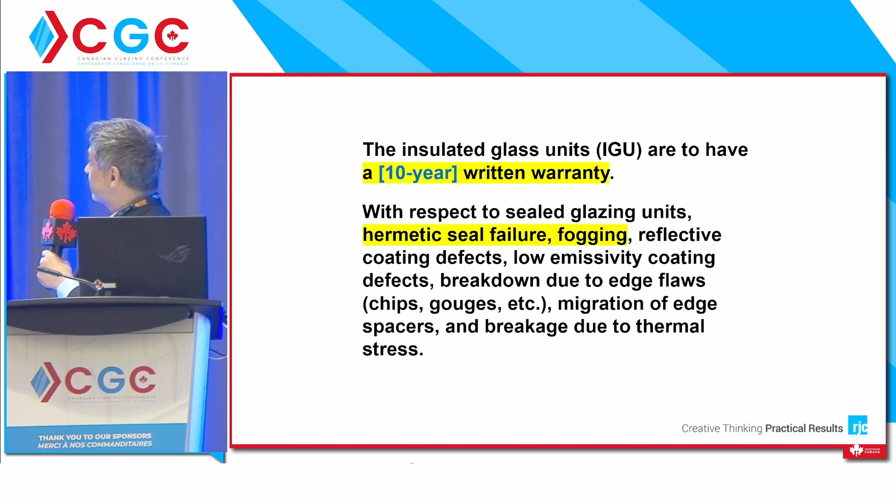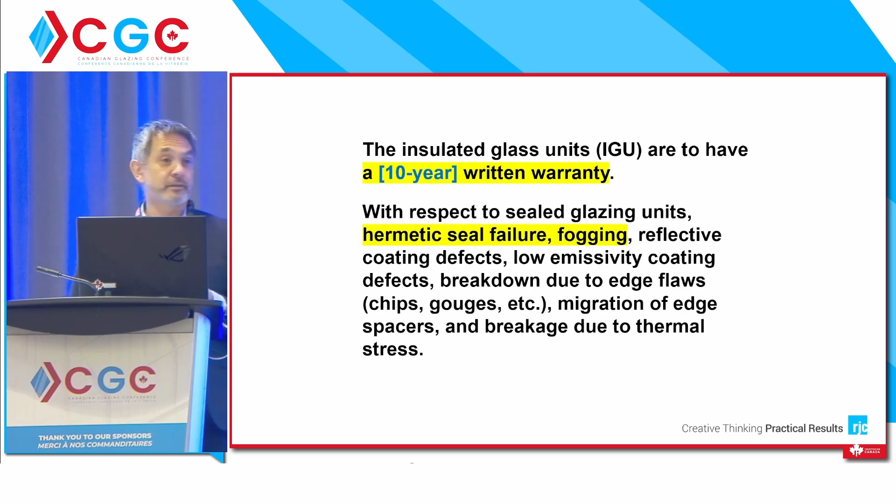What do those things say? Well, usually they say the insulated glass unit should have a 10-year written warranty. And I won't read that all out, but it's against hermetic seal failure or fogging, and some more stuff in there.

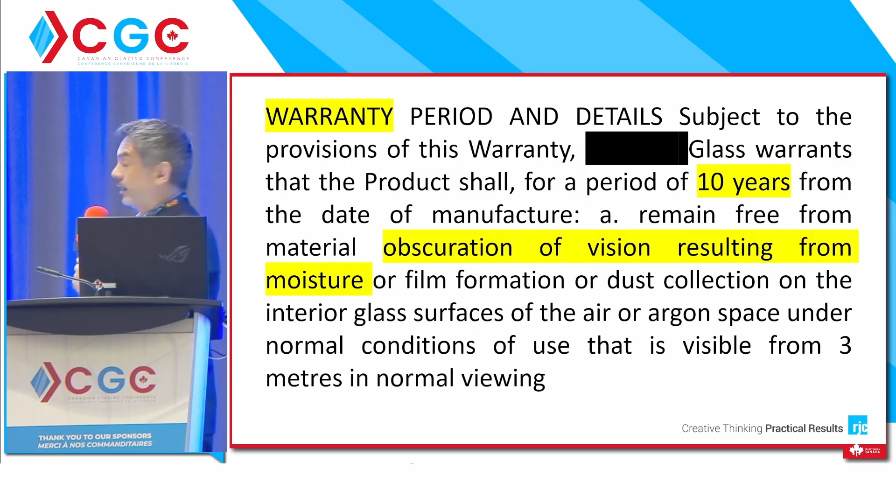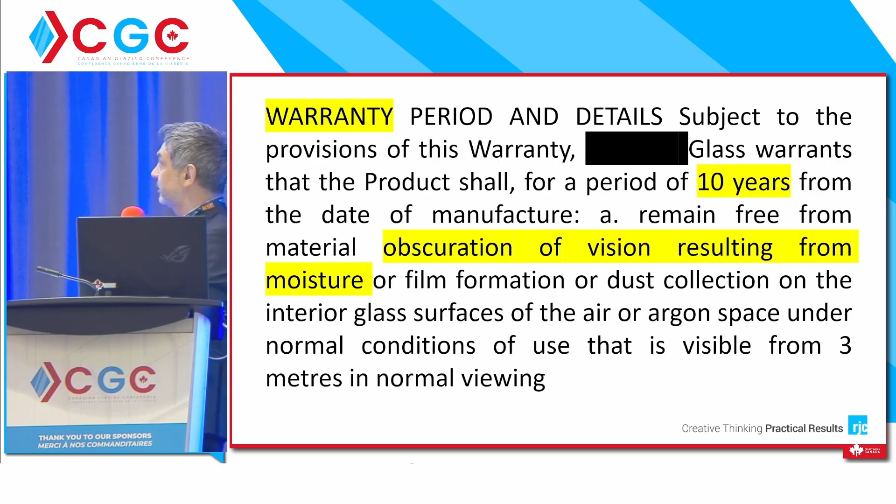Okay, so there should be a written warranty, right? What's the written warranty say? So dig up the warranty document and you'll see something like this: the warranty period, details, blah, blah, blah, 10 years, free from material obscuration of vision resulting from moisture or film formation, right? That's fogging. Okay, so we should be getting at least 10 years out of it.

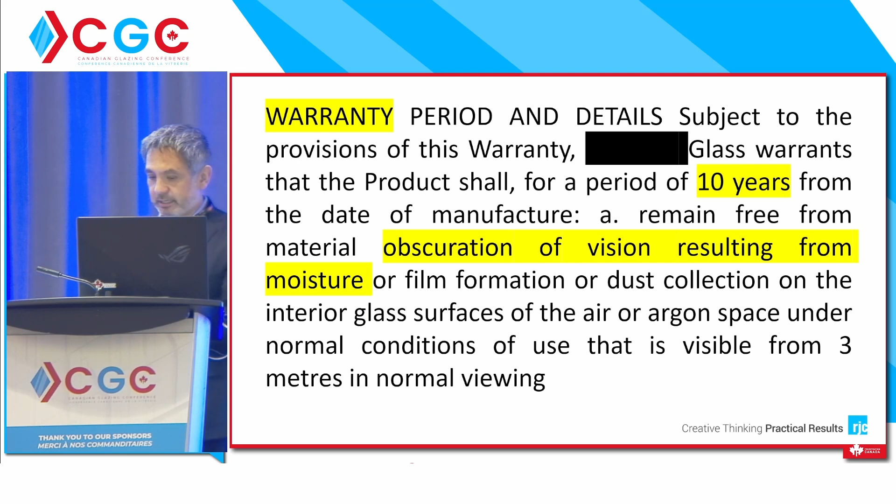I don't remember it being that long ago that those windows were installed, so I'm thinking, okay, I'm going to call my warranty provider and get those things replaced. But again, my curiosity drives me to want to look at what the industry standards and what the codes say.

The whole presentation isn't going to be slides with words, but I thought this was a good way to get started. So there's the IGCC, which is the, they changed their name, so I always get it mixed up with IGMA, but it's the Insulating Glass Certification Council. So if your windows are certified to IGCC, it means you've tested them either to this ASTM standard or the CGSB, the Canadian equivalent standard.

And if you've done that, that means you've met code, because whether it's the Canadian code or the BC code or the Vancouver Building Bylaw, it means that you've tested to either one of those standards. So if you have IGCC certification, it means you meet the code. But if you don't have that certification, it doesn't necessarily mean you don't meet the code.

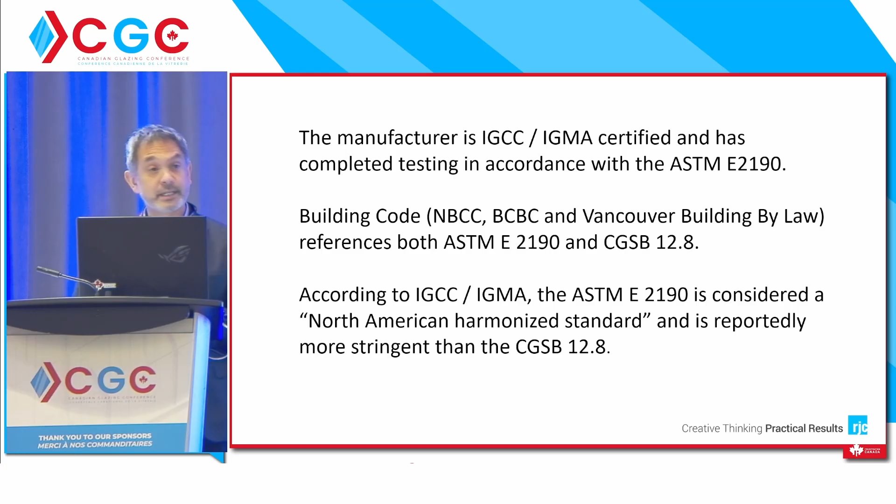But these standards drive how you test and challenge your sealed units and try and create some standards among manufacturers to challenge the durability of the edge seal, primarily to prevent fogging and to maintain the energy efficiency of those windows. Okay, so this gets me into what I want to talk about today, which is the service life of a window.

The expectations around how long your window should last, or the time it takes to get it to fog in service, relies on the edge seal and primarily its ability to keep moisture vapor out of that cavity between the two sheets of glass. So this is largely driven by the diffusion of vapor through the components of that edge seal. And when you get enough vapor in that space, under the right conditions, you'll get condensation, which is what fogging is. So the seal integrity is directly related to the service life of the unit.

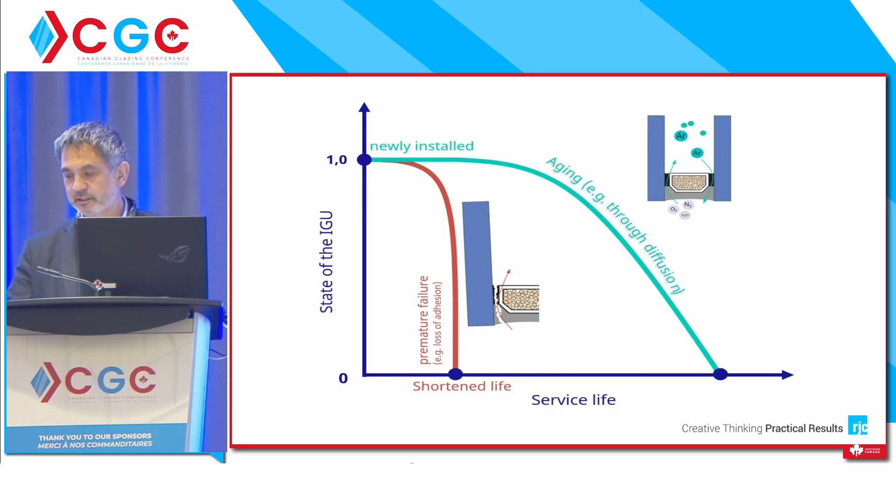And that's really what I want to spend the rest of the talk exploring with you. This is going to be sort of my collected works and thoughts over 20 plus years in the industry. This is kind of a new presentation, new material, and it's all my thinking that I've pulled together over this time frame around trying to answer that age-old question: how long should my windows last before they start fogging? So a good starting point, I thought, was to try and understand or describe a little bit the science behind condensation.

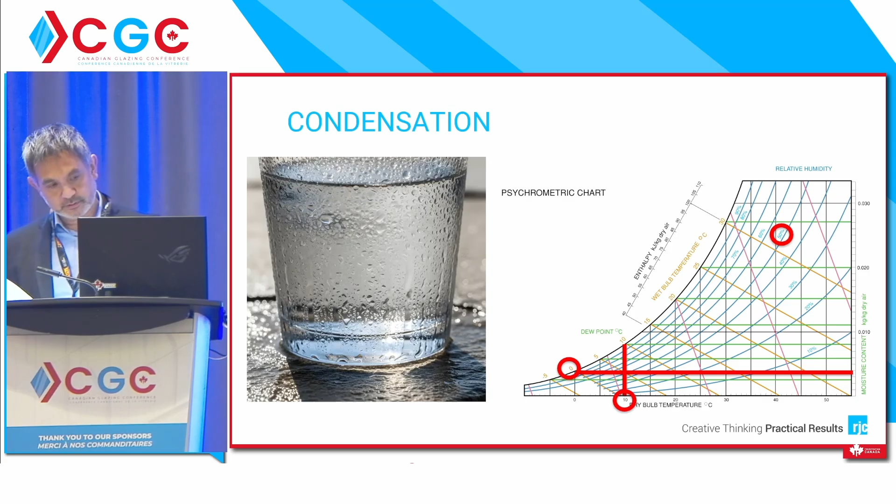So what happens if you put a warmer glass of water out? Say a steaming hot glass of tea - you rarely or never see condensation forming on the outside of it. Why is that? Well, the psychrometric chart says that at 50% relative humidity, and I picked 27 degrees because it's a convenient number on the chart, 27 degrees isn't very warm - your guests would be disappointed if you gave them a cup of tea at 27 degrees, it's like tepid water, like a cold bath. Body temperature is about 36 degrees Celsius. So what this says is that if you put that tepid glass of water on the table, you would only see condensation forming at around 40 degrees. So you're not going to see that in Vancouver.

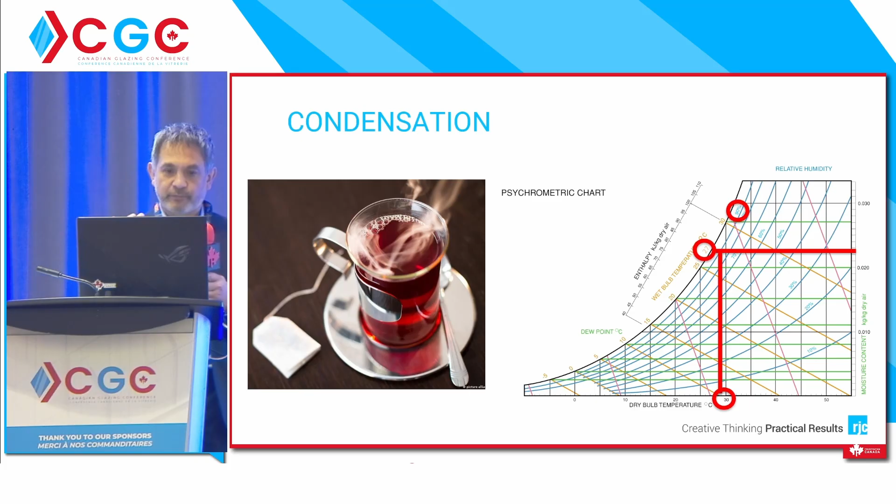Now say you were somewhere in Asia, Indonesia maybe, where the humidity might be higher, like 90+% humidity - you would only see condensation forming at around 30 degrees, according to this chart. So without explaining too much more, the point is there's reliable information from this chart. It's very predictable and relatable to basic quantities we can understand - relative humidity, temperature, and the surface temperature where we expect to see or not see condensation forming.

So how does that work within a sealed unit? We have to talk about permeance, which is the rate of transmission of vapor into that airspace. That's largely driven by the components of the edge seal. You've got two pieces of glass, which is pretty much impermeable to moisture vapor, and you sandwich that together with the spacer bar.

The spacer bar can be a lot of different things, but for argument's sake let's say it's a metal tube - you can go back and look at the Vitrum table, they have a nice cutaway. You can see a metal tube filled with desiccant, and it's glued to the sides of the glass with PIB, polyisobutylene. It's basically a glue that sticks the spacer bar to the glass. You try to get that as thin as possible, less than 1 millimeter thick and maybe 4 or 5 millimeters deep depending on the size of your spacer bar. That generally dictates the amount of moisture vapor that transmits through the edge seal, because it has very low permeability and a very small area. That's there just to glue the spacer bar in place.

Then there's the silicone, the secondary seal, which is the structural glue that holds the sandwich together. When you think about vapor transmitting through that assembly, the PIB is the limiting factor because it has the lowest permeance - it's the most difficult for vapor to go through. I use the example of a multimedia water filter, where a layer of really tightly packed material is what the water has the most difficulty flowing through. That's kind of like the PIB, and that's the limiting factor of what transmits moisture into the sealed unit.

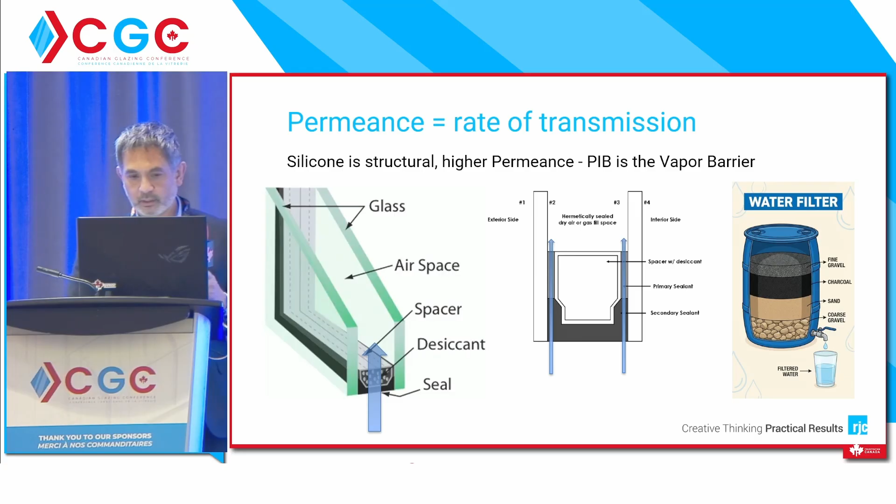Okay, we're getting a little more serious about the science here, but again, this isn't supposed to be about moisture diffusion physics, but this is a very important idea here. So moisture or water vapor behaves differently from water, and it follows the laws of vapor diffusion, which is governed by Fick's law. So I'm an engineer, I like equations, so I put one equation on my presentation.

Water vapor is sort of the liquid water in its gas form, and it's formed naturally through evaporation. When you heat the liquid up, the particles of water kind of break free and they turn into this gaseous form. And the limit of how much vapor is in the air above the water is dictated by the vapor pressure that's in that system.

I don't think I'm explaining it very well, but again, this isn't supposed to be about the detailed physics of the way this works, but there's an equation, and the amount of diffusion that occurs is based on the vapor pressure difference. Physics says that you go from a higher humidity to a lower humidity. And if you think about that spacer bar, that's that solid red thing where moisture is from the outside environment trying to drive into that dry airspace inside the unit.

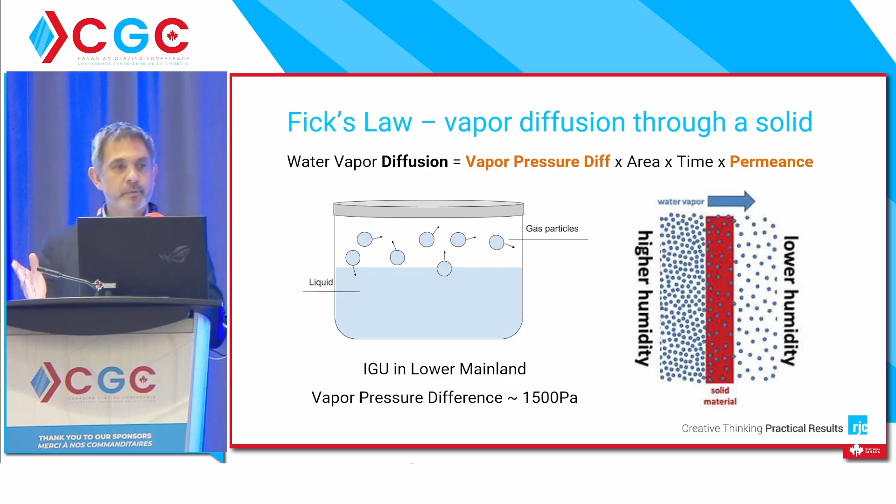So in Vancouver, we generally accept that the vapor pressure difference is like 1.5 kPa. That might not mean anything to anybody, but that's a number that we use to sort of average out over the year to account for the fact that you have very little humidity inside the unit and a variation of humidity outside the unit. And that creates this pressure differential that wants to drive the moisture into the unit through that PIB that's holding the spacer bar in place.

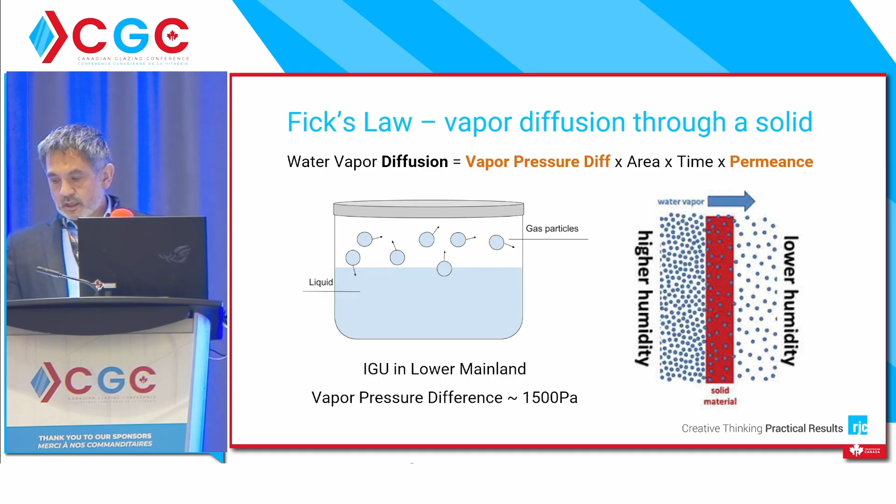Okay, so how reliable is the science? And this is really sort of the basis of my talk. Oh, wait, there's another slide here that's out of order.

Okay, so when is the primary seal not good enough? This is like the age-old question, because we know the primary seal is very important to stopping moisture from entering the cavity. And there's not really a lot of information out there. There's this standard that's published by IGMA. It's the TB 1250. And it talks about these 3 standard kind of deviations from what you should expect when you're manufacturing sealed units. So there's this squeeze out, and I think we can kind of imagine what that means.

You lay down this line of PIB as the glue and you push the units together, and some of that PIB is maybe going to squeeze out. And so this standard is saying, if you're a manufacturer, you should limit that to about 1/8 of an inch. There's this thing called migration. We've probably all seen that. These little fingers of the PIB that kind of leak out and create this weird looking appearance on your spacer bar. It says that if you have more than 1/2 inch migration, there's something going on with your PIB. So that's not good. It's not really acceptable from a manufacturing tolerance standpoint.

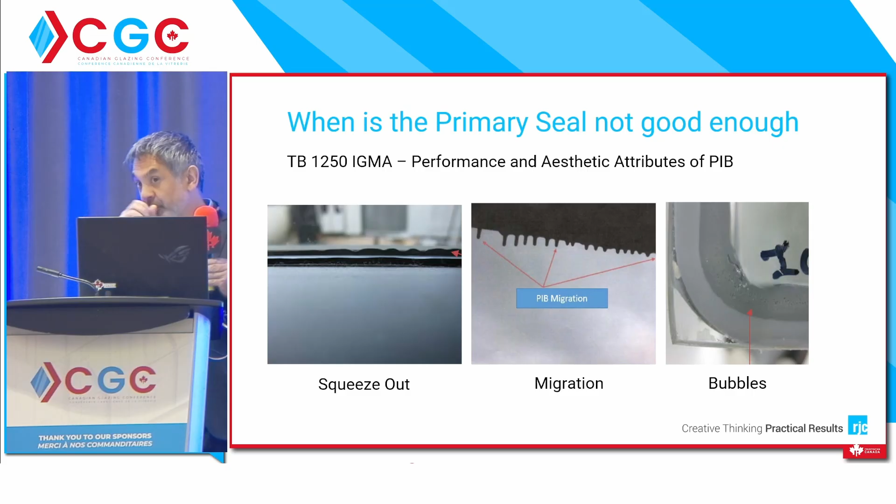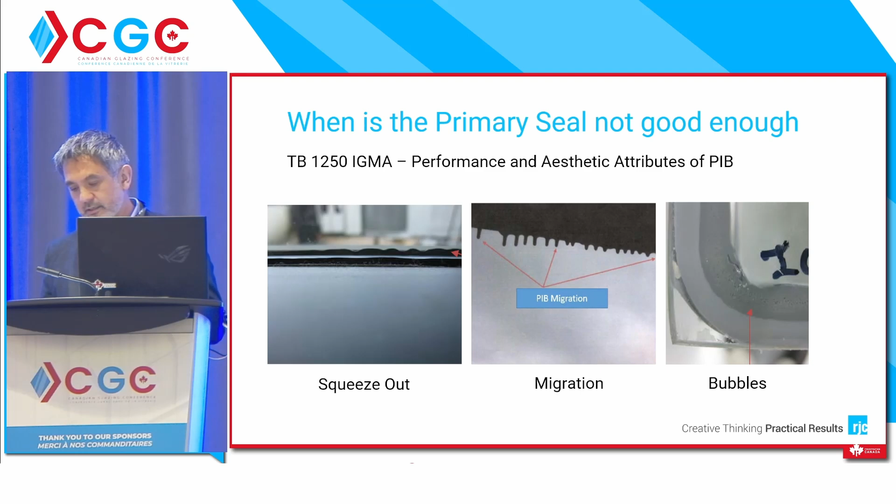It says bubbles can form in your primary seal and your PIB. It says that you should be careful to limit how much bubbles form, but it doesn't give you any guidance. Maybe some of the IGU manufacturers can shed some light on this, but there's nothing that says your bubbles should be this big or this small. It just says you should be careful about bubble formation. In the end, this is a qualitative guide for manufacturers and doesn't give any guidance on the effect of the permeance in the PIB or any direct correlation to IGU lifespan.

So that brings me back to the science, that Fick's law equation. How reliable is it? Well, I think I've seen that the science, being what it is, can be applied inappropriately sometimes by engineers that are trying to do their best to figure things out. You can't look in a book for the properties of PIB and the permeance values. There's many things that aren't very well defined.

So as an engineer, there are certain things like concrete and steel which are very well defined. You can look in a book and it'll tell you the strength of the steel, and it'll tell you many things about those materials, and you can rely upon them to do calculations to determine an end result. You can't really do that with Fick's law because there's many things that are not defined in that same way. So there's no science that has taken the science and made it relatable to actual reality. That's the whole point of my talk, really.

And the results can be very sensitive. You change that little thin strip of PIB, you change that dimension by 10%, and that can have a huge effect on your predicted lifespan of the unit when you apply this law, Fick's law.

So here's a story of something that occurred on a project site that I was involved with, where we had some units delivered to site, and they were clearly defective. The edge seal had bubbles in it, and there were huge gaps, and we just said, you can't install those. Those are defective. They don't meet the spec. Send them back. So they didn't like that.

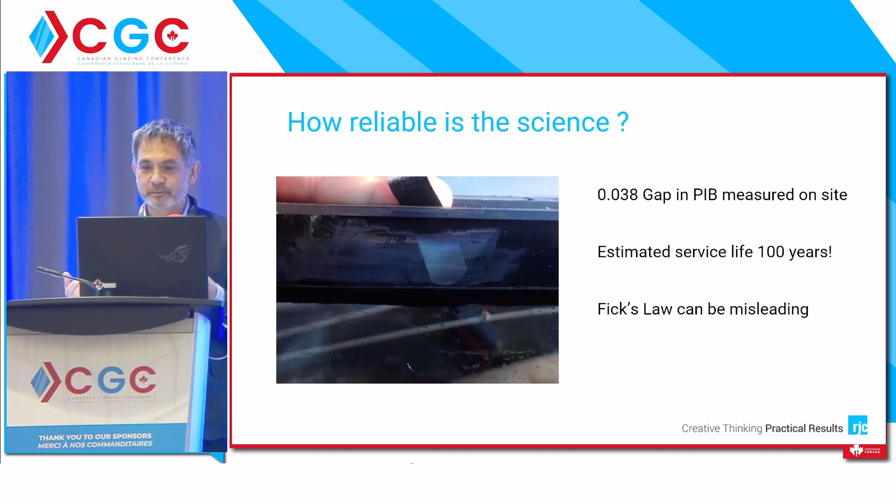They went and hired another engineer who went to site and did measurements. They measured the gap in the PIB, and they said, there's a gap, but that's okay because of all these other things, and we use this equation to determine that there's still 100 years left in that unit. I'm like, okay, well, that sounds pretty good. You're saying that the warranty is only good for 10 years, but now you're telling me it's good for 100 years, even with these gaps.

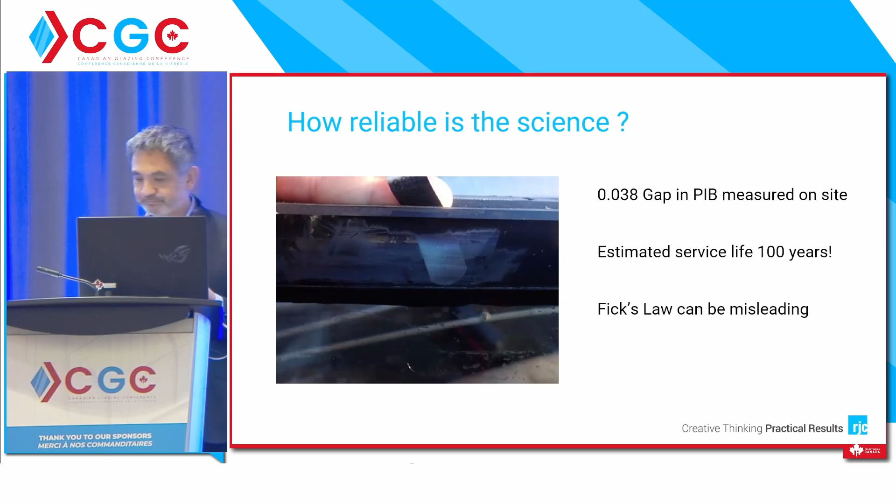So we went back and forth on it. And of course, they weren't willing to extend the warranty to 100 years. So that all went away and they replaced the units. But again, this is my thesis here, that there is a science behind it, but the science is not well defined in a way that it can be used reliably to estimate a service life, which I know my title is Lifting the Fog on IGU Durability, but I'll get there.

Okay, so what can you do? There's some testing you can do. There's a frost point test, and I'm assuming many of you know about this. There's an ASTM standard for it. You take dry ice, you pack it into this thing, you stick it up against the window, and you lower the surface temperature of the glass at intervals. And if you get down to like -70 and you don't have dew forming on the inside face of the glass in that airspace, that's basically telling you that your dew point is -70 or less, which means there's very little or no moisture inside that cavity, which is what you want.

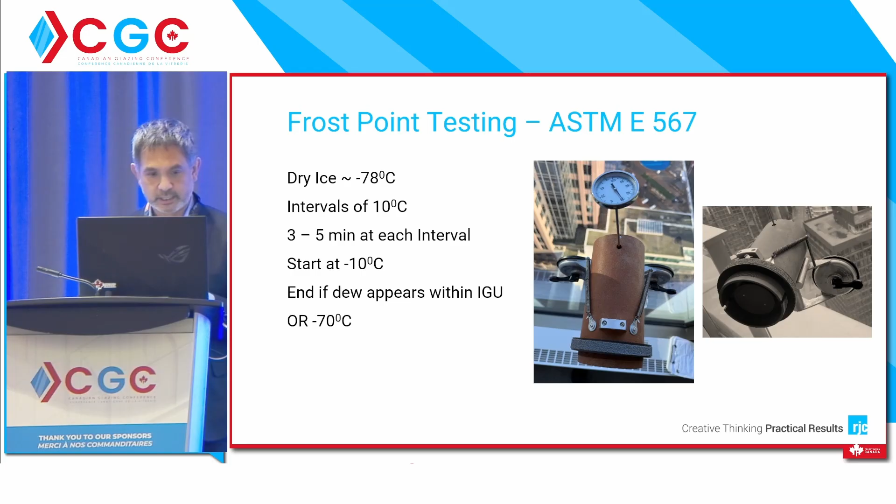The problem with this test is it takes a long time, and a building can have like 2,000 windows in it. So if you wanted to test all the windows, you'd be there for a long time. Nobody really wants to pay for that.

There's this other test, and I want to credit these folks that published this article in the 2024 Ontario Building Envelope Council publication. Hildebrand, De Rose, and Lukes wrote this article that suggested that you can use this compressed air test. It's basically that air that you use to clean your keyboard out, compressed air. You turn that canister upside down, you spray it on a window like you see here. And that'll get the surface temperature down to about -45 degrees Celsius, very cold, right?

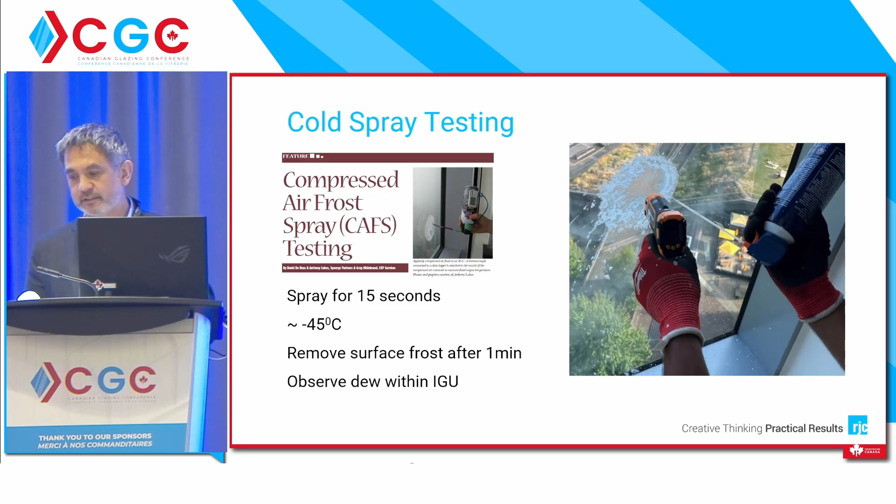So you use a digital thermometer to check that. And once you know the surface temperature is down to -45, you just look to see visually. You've got to scrape that frost away and look to see if there's condensation that forms on the inside of the unit. And that test takes about a minute versus like 20 to 30 minutes for the other frost point test. So what does that tell you? It tells you that there's very little moisture in that airspace. But if you want to try and use that number to predict how much time is left in your unit, it's kind of difficult to do.

So back to the psychrometric chart, you're kind of far off to the left. And again, the only conclusion I think that I can draw, well, you can get deeper into the numbers, but at this point, you can just say at -45 or -70, you don't have a lot of moisture in your airspace, which is what you want because you don't want condensation forming to obstruct your view.

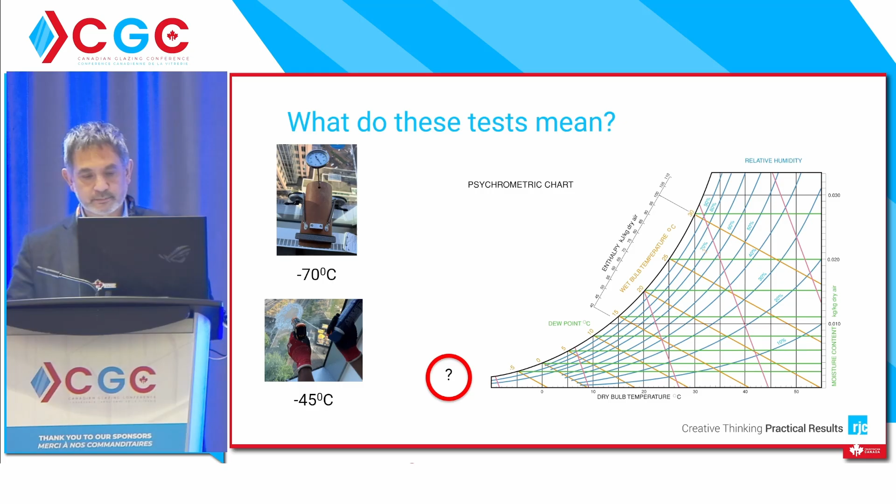Another important part of this whole assembly, which I haven't talked about yet, is the desiccant. Desiccant usually fills inside that little spacer bar tube. And again, there's a nice cutaway back there at the Vitrum desk. There's these little tiny balls, they're like less than a millimeter in diameter, and they're called molecular sieves. So I don't know, that sounds kind of cool, right?

But basically all it is is a special molecule that has these little pockets that fit a water molecule, and it kind of snaps into it. It just grabs these water molecules, right? So that's how the desiccant works to remove moisture vapor from the air. It selectively adsorbs or traps moisture vapor or water molecules.

So the desiccant acts in conjunction with the PIB, the primary seal, to keep the air inside the unit dry, and it works. The PIB stops the transmission of moisture vapor into the unit, and whatever moisture vapor might be in there from original manufacture or sneaks past the PIB, the desiccant should grab it while in service. So the desiccant is very important, and I'll try and show how important it is to the lifespan of a unit.

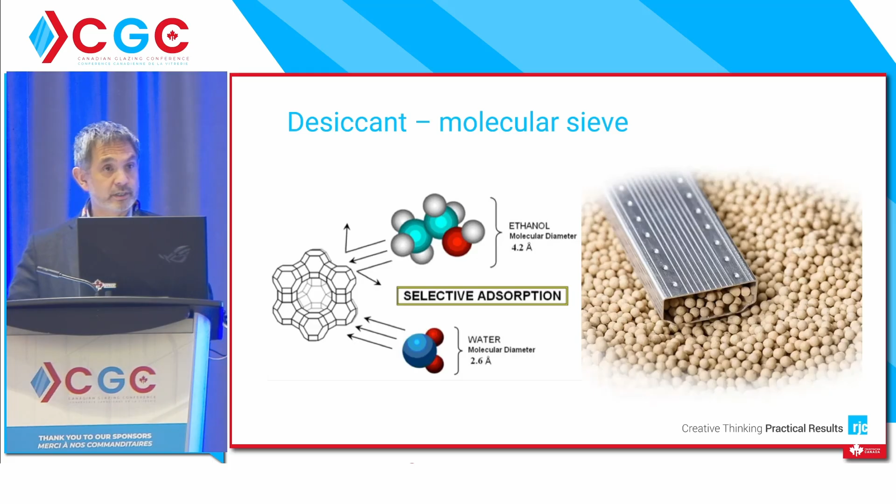So again, I'm a very curious person, and knowing that desiccant is very important in the performance of a unit, and you can't really see it, other than what you see in books and reports, I grabbed an old sealed unit, cut it apart, took the spacer bar and snapped it in half, and took what I thought was desiccant in the middle of that spacer bar. And it had that same appearance, these little brown balls.

And then I grabbed a little scale, a thermometer and a hygrometer. And then I built this little chamber out of an old takeout food container so I could modulate the humidity inside. So then I measured the desiccant, just the weight of it, put it on the scale. And over time, you can see there's different dates. And I measured the humidity in the office. It was around, less than 40% humidity.

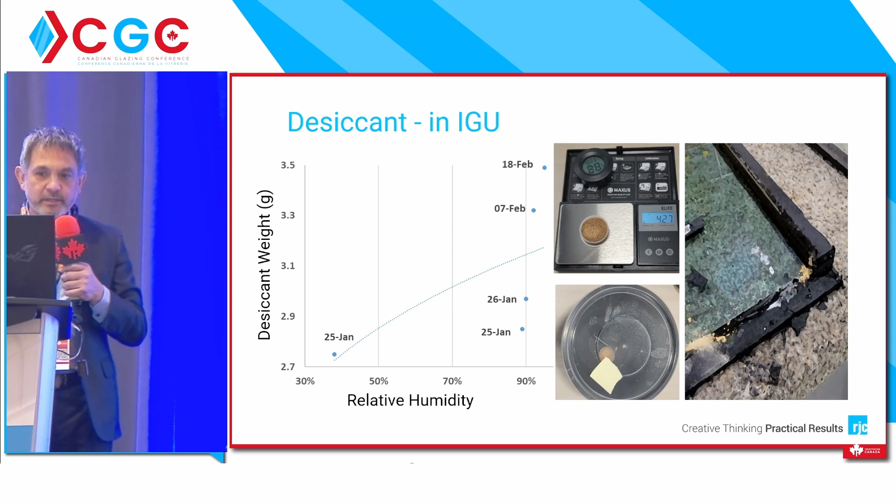And then I stuck it inside that little old food container with water in it. And I measured the humidity in there. It was like 90%, a really high humidity environment. And what I discovered is that the weight of that desiccant increased with increased humidity, and when exposed to that humidity over time, the weight increased. So I could only assume that it was acting as molecular sieves do, and it was adsorbing the moisture.

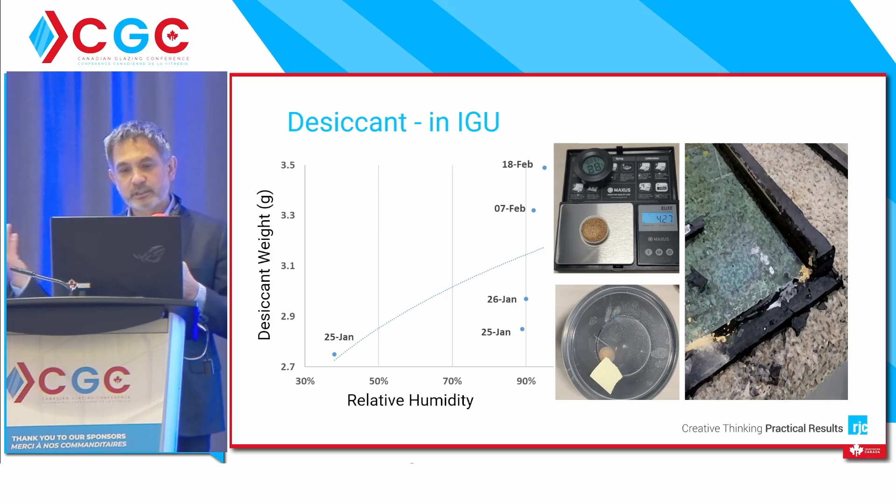Now, of course, that's not really reliable to use for anything in terms of calculating lifespans. So I sent the desiccant off to a third-party lab, a proper scientific lab. You can heat the stuff up really hot, and it ejects all the water molecules out of it, and you can weigh it when it's perfectly dry, and then you have it come to equilibrium with different humidity environments, measure it, and calculate the amount of moisture vapor that's stored in that desiccant.

So it's measured as moisture content on the vertical axis, in grams of moisture per 100 grams of desiccant, relative to the relative humidity. So let's do a little thought experiment. You've got a window that's, say, 1.5 meters by 3 meters, or 5 by 10. That's like a standard office size sealed unit. You've got a spacer bar that's like 11 millimeters by 4 millimeters.

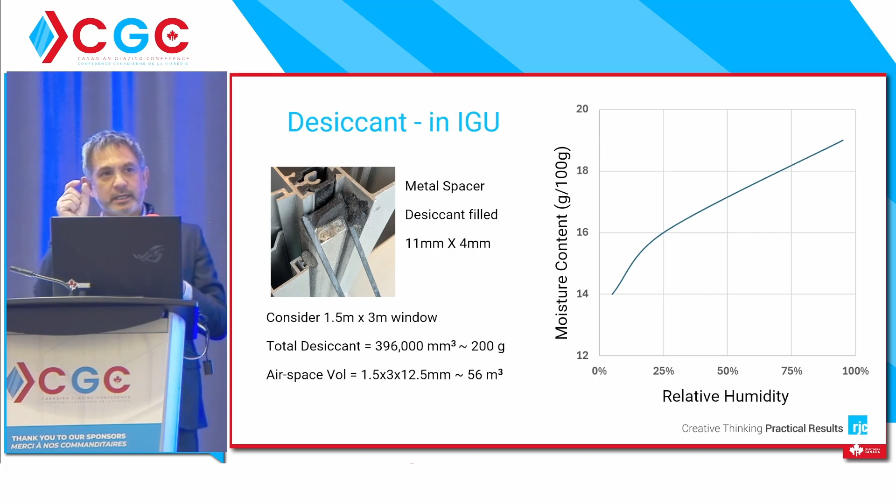So you've got a PIB glue strip that's like 4 millimeters on either side of the spacer bar, and the PIB might be less than a millimeter. You calculate the volume inside that spacer bar. And again, the data isn't really out there, so you have to look where you can to find it. And the bulk density of desiccant that I used arrived at 200 grams of desiccant in this 5 by 10 window. Just keep that in mind.

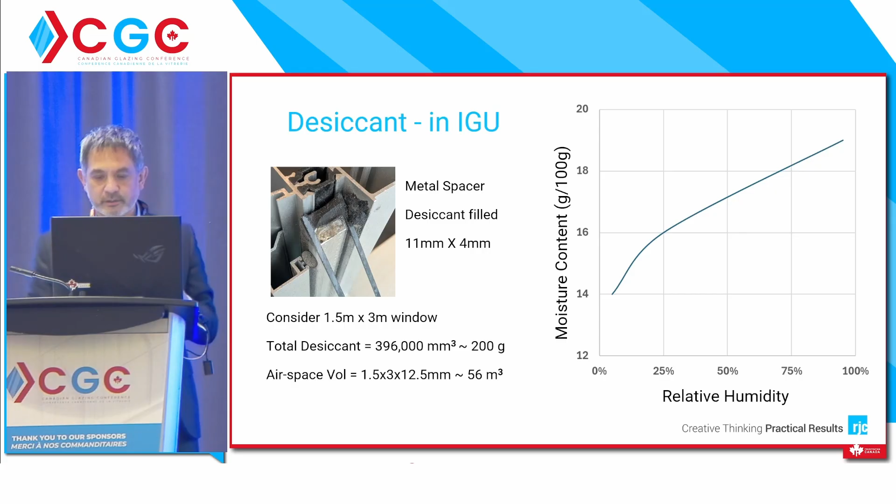And then just remember this. Well, I don't know how easy it is to remember this graph, but there's this curved line that's moisture content over relative humidity, right? So then you take that and you mash it together with the psychrometric chart.

And you just have to trust that I did it right, because I'm not going to get into how I did that. But it was painstaking, let me tell you. So again, this thought experiment of this 5 by 10 window, you get 200 grams of desiccant in that spacer bar. And then you assume that airspace temperature is like 20 degrees. That's like the ambient temperature inside that airspace.

So again, I don't know, just my feeling, and maybe some of you that are very experienced in this industry, like 1/10 of a cup of water, you turn that into water vapor and inject it into a sealed unit, you'd kind of think that it's probably okay. It's not going to fog at minus 10 degrees like in the winter, but if you challenge it to like minus 45 degrees, maybe it would start fogging, right? That just felt right to me.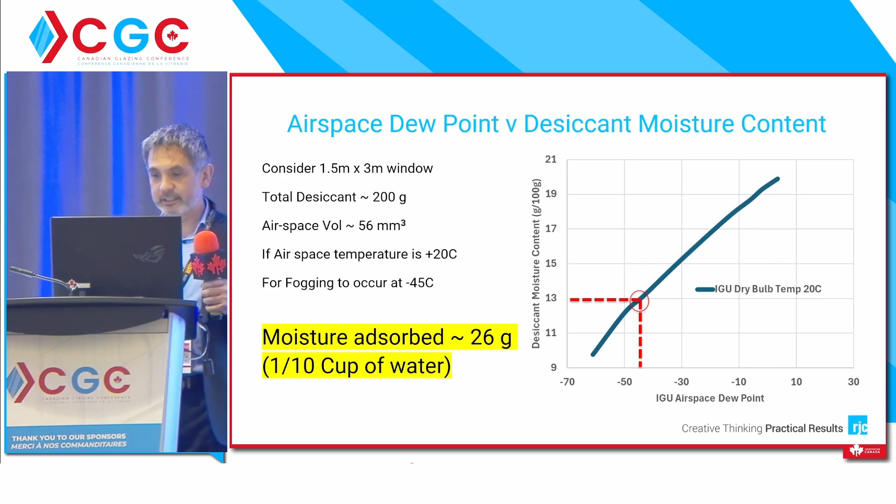So I was like, okay, I did all these weird calculations and I sent this stuff off to a lab, pulled it out of some weird window that I found in the storage room. And it kind of all made sense. So this made me feel pretty good about what I was doing, because I thought this was fairly technical stuff. So now I'm at the end. What does that all mean? What does that mean in terms of how long should your window last? Well,

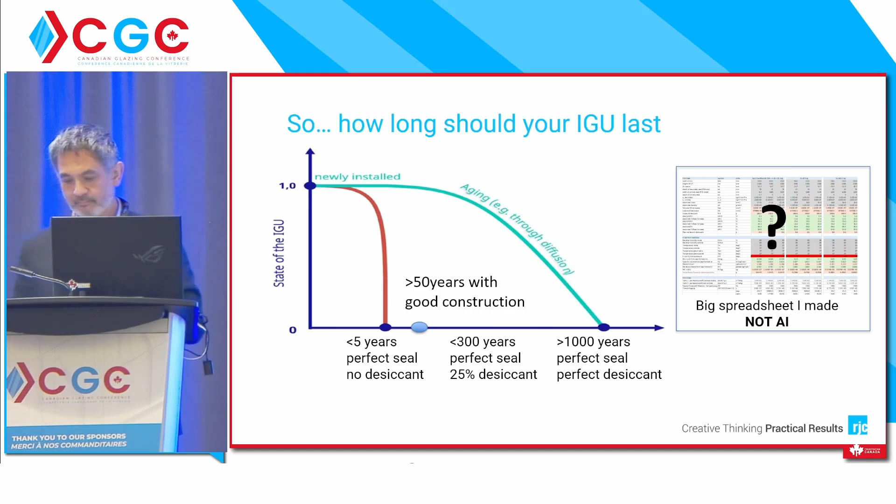Excellent. Thank you. Question for Leonard? Anybody? Right there.

That equation varies pretty drastically between Vancouver and Winnipeg, though, I think, right? Sure. Yeah, it's going to be different. Hi, Leonard. Fantastic presentation. That spreadsheet looks really painful. My name's Scott. I'm with Quanex. Have you done any similar studies with warm edge spacer? No, I mean, I haven't done anything product specific per se.

Well, you said the warm edge spacer. Well, okay. This is not like a tube with desiccant in it, right? I was just having a conversation with somebody about that. I've tried to run the numbers on that, but I'm not going to call out anybody's name here. You call up the manufacturer and you say, what is this stuff made of? And it's got desiccant in it and it's got low permeability. So how does that work? The desiccant grabs the moisture, but it's trapped in this thing that doesn't allow moisture to get into it. So again, the science is there, but the data is not presented in a way that's usable.

And we did use that product on a building in Edmonton. So I did try and go through that exercise, and based on the data I got, the permeance and the desiccant is about equivalent to a spacer bar filled with those little round balls. That's correct. I'll take this offline. I can get you that technical information on warm edge spacer. Okay, I'd like to get that. But it took a lot of phone calls, and I had to go through a lot of different people to get that information. You can't just open up a textbook. If you want to find out the strength of 350W steel, no problem. And it's a reliable number within plus or minus 10%.